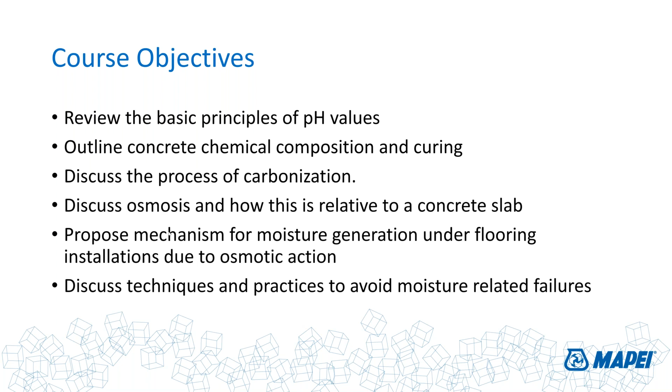We're going to talk a little bit about the proposed mechanism for moisture generation under flooring installations due to that osmotic activity, and discuss techniques and practices to avoid moisture-related failures. Again, a lot of this is based on me asking the question, well, where did the goo come from? And why did this happen? And what does this really tell me? And how do I avoid this in the future? So hopefully that fits with some of the things you'd like to hear about and learn about. Again, if you have any questions, by all means, save them to the last, and I'll do my best to answer them.

Let's start off with a kind of dumb rhetorical question. Is it stone or concrete? It sounds silly, but the two are very similar products in some respects.

They're both very hard, both very durable, but made in considerably different ways. We'd love to be able to build on stone, and some of our ancestors built on nothing but stone, carved it with hand and chisel, and that's what you walked on, leaned on, and what protected you from the rains and elements outside. But how was that made? Obviously it's a natural process over billions of years at very high pressures and temperatures, and you wind up with granite or marble or whatever else, but they're all stone.

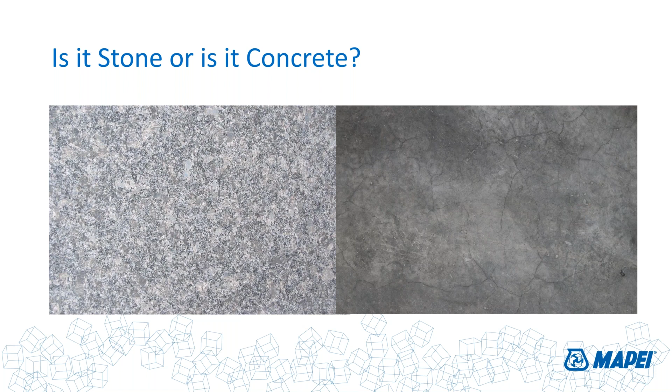Concrete, what you might consider synthetic stone, has many of the same properties. It's very strong, with compression strengths that can get up to 6,000 to 7,000 PSI, where stone's in the 12,000 to 16,000 PSI range. They're both hard, with similar Mohs hardness scales, but they're put together considerably differently. Concrete is the result of a chemical reaction where water is added to some chemicals along with some aggregates, and over time it crystallizes and makes a synthetic stone. But that's about where the similarities end.

I'm going to go back and spend a little time talking about testing the health of a concrete slab, the things that are relative, or that we currently use to test a concrete slab for what we think is important as a floor covering installer. I think everybody understands what those tests are, but according to ASTM test methods or requirements for resilient flooring, I'll go through them.

There are three tests that are pretty important: the ASTM F-1869, the moisture vapor transmission rate test; the relative humidity test, which is ASTM F-2170; and the pH test, included in the ASTM F-710 documents. For those of you on the webinar today who are involved in this industry, if you don't have copies of these, I highly recommend getting the current ones from the ASTM website. They're copyrighted and owned by whoever pays for them, so it's something I can't just share with you, but you can buy your own copies. It's important to have in your document library, because all the procedures, requirements, and interpretation of results are in those documents.

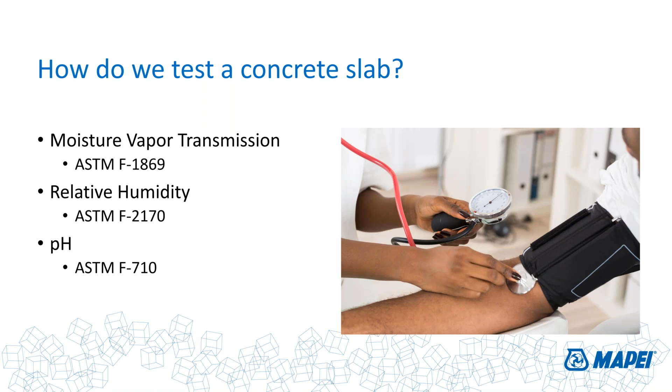So let's spend a little time explaining what these tests are, what they do, what they report, and how that's relative. The first one is the ASTM F-1869, the calcium chloride test kit of infamous renown.

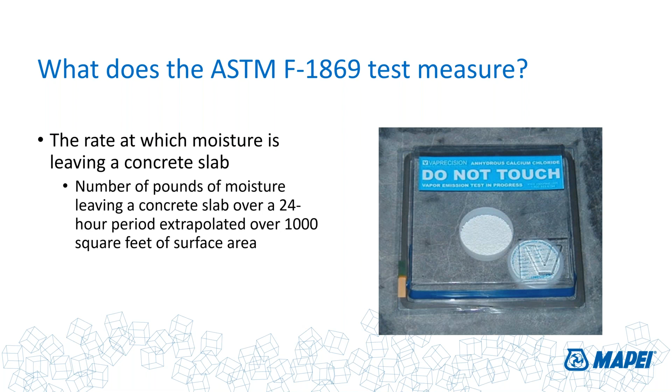What does that measure? It measures the rate at which moisture is leaving a concrete slab. That number is reported as a number of pounds of moisture leaving a concrete slab over a 24-hour period, extrapolated over 1,000 square feet of surface area. This test has been around forever, probably following the rubber mat test or other earlier methods, but it's a way to quantify the rate at which water is leaving the system. So again, what does that really mean? It tells you how much water is evaporating out of the slab over a period, over 1,000 square feet, and from that we come up with numbers.

From the days of old, the rule was you couldn't install anything over a slab with more than 3 pounds of water vapor leaving the system over 24 hours. Raise your hands as to when was the last time you've seen a 3-pound concrete slab — in my 35 years, I don't think I've ever seen one. But it does give you an idea of the rate. Obviously, theoretically that's going to change over time, as the water starts to leave the system, the rate will slow down, and so on.

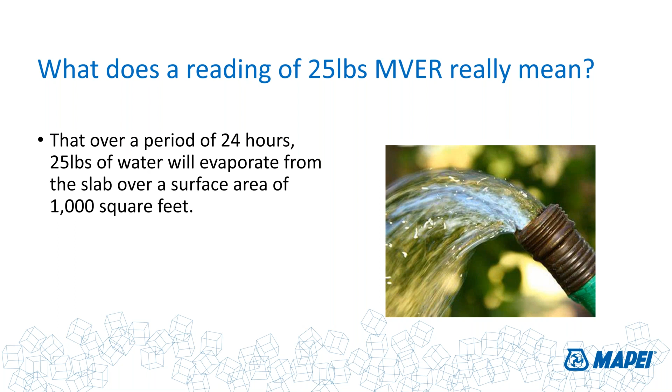Here's what I think is kind of an interesting thing — has anybody really thought about what that number means? Is it a big number, a small number, what does it really mean? If you take the concrete slab you're trying to deal with, 1,000 square feet of concrete at a 6-inch depth is equivalent to, if my math is correct, 55 cubic yards of concrete.

That's a lot of concrete. 1 yard of concrete at a 0.5 water to cement ratio will have 235 pounds of water as part of the mix.

So 55 yards of concrete will therefore have 13,055 pounds of water in it. If you divide that, that's a lot of water - that's a pretty good swimming pool of water. And about 45% of that water is put into the system to help move it around, make it fluid, get it to be able to place, and also means that it's available to evaporate.

Or half of that number, 5,875 pounds, will have to leave through evaporation, or wick out or go somewhere else. But that's something that I've never really thought about, and then you might have some consideration.

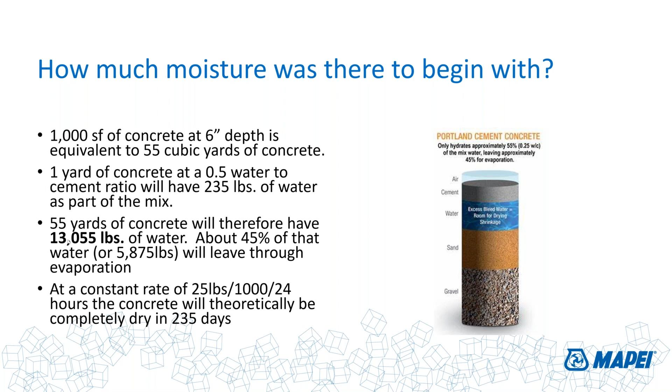And it's really something that's never really going to get to that completely dry phase. It's always leaving. So a little bit of trivia for you in terms of what to think about, but I've always wanted to know, and I'm curious minds, what does that mean to have a 25-pound rate of evaporation coming off a concrete slab? And what does that really mean in terms of how much water is really there? So now you all know a little bit about what that means.

Now, what's also important to note about the moisture vapor emission rate information is that once you cover it with an impervious moisture material, whether that be an epoxy membrane, vinyl sheet flooring, something that's non-breathable, or even tile and resilient tile products for the most part, once you start covering it with an impervious moisture vapor barrier or impervious floor covering material, you basically turn off the valve on the evaporation rate. That should be quite simple to you. And at that point, the MVER becomes irrelevant - it no longer has an opportunity to evaporate into the atmosphere.

Having said that, on the other hand, things that are porous or absorptive, like carpet or wood, will allow the slab to continue to breathe. But impervious floor covering is like closing the window on the outside - the humidity on the outside is going to remain on the outside. Porous floor coverings like wood or carpet are like closing the screen, slowing down some of the movement of the vapor from the concrete, which in this analogy is the outside humidity, to move through it as well. So something to keep in mind as well.

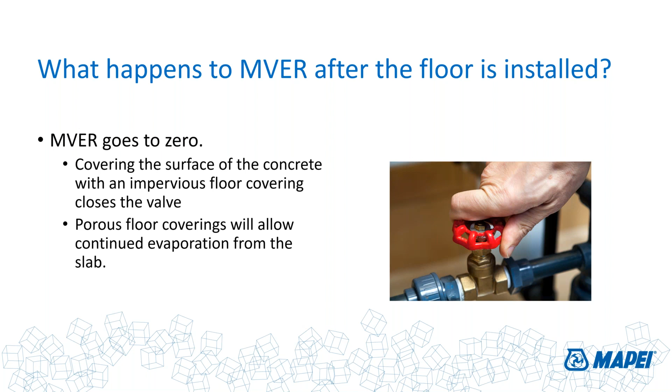I do want to address some mythology that I've heard numerous times in the field, and that is that the moisture vapor emission rate is a pressure. The difficulty, I guess the logic why people came up with this, is that somebody says it's 25 pounds, a concrete slab, and you get the feeling that we're talking about pressure, like air pressure going in a car tire - you fill your tire up to 25 pounds of pressure. This is not a PSI reading. Please do not construe that the moisture vapor emission rate is a pressure reading like PSI.

It is a rate at which things are moving through a concrete slab. It has nothing to do with pressure. And things that are going to affect that rate, and obviously things that they've tried to address in the ASTM F-1869 standard, are things like the porosity of the concrete slab. That's why they want you to do this test on an area that has been ground or opened up, as opposed to something that's highly polished and finished, so you get an idea what's underneath it - which I always thought was kind of weird, because you're not going to grind the whole floor, you're going to install on the burnished concrete. But okay, that's the standard that allows you to get to a consistent surface to work with, because burnishing and polishing all comes up with different rates of porosity.

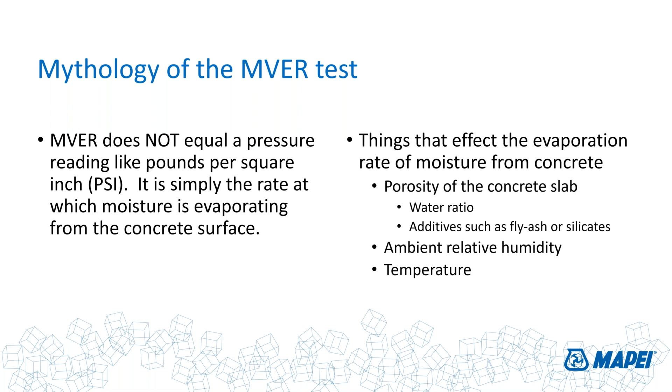All these things are chemical reactions, and all of them are dependent on the temperature at the time. Again, lower temperature means lower chemical reactions, lower emissions, lower evaporations. Higher temperatures, on the other hand, will make things a lot faster. So something to think about.

The other test that we perform on concrete slabs that's become very common and very important is the ASTM F-2170. This is the test that measures the amount of humidity contained in the concrete slab. I think this one is becoming more relevant and more important to us in the floor covering industry, because it really tells us more about the state of a concrete slab, the condition inside.

It's also important that you realize that the probes used to measure the RH of a concrete slab require you to know the depth of the concrete slab you're working with, because it's supposed to be put into the concrete at 40% of that total depth. So if it's a 4-inch, 5-inch, 6-inch, 8-inch, or 12-inch concrete slab, you have to do a math calculation to figure out how deep your probes have to go in. That's a very important deal.

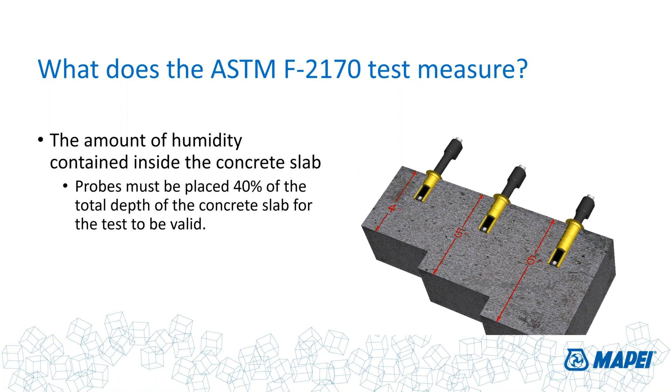Why is that important? Because what this test will tell you about the concrete slab is what is going to be the expected homogenized humidity of the concrete slab once you put an impervious floor covering on top of it. So again, the concrete in its normal living condition, uncovered and open to the atmosphere, is allowed to evaporate.

It's definitely going to be a little bit drier on the top of it, and towards the bottom, it's supposed to be - if you're on top of an impervious moisture barrier, which every concrete slab is supposed to have, which we know it doesn't - a lot damper on the bottom. But as soon as I put something on top of it to close it off, all of the humidity balances itself out. So the RH reading that you get in a concrete slab is supposed to be indicative of what it's going to be once you cover it with floor covering.

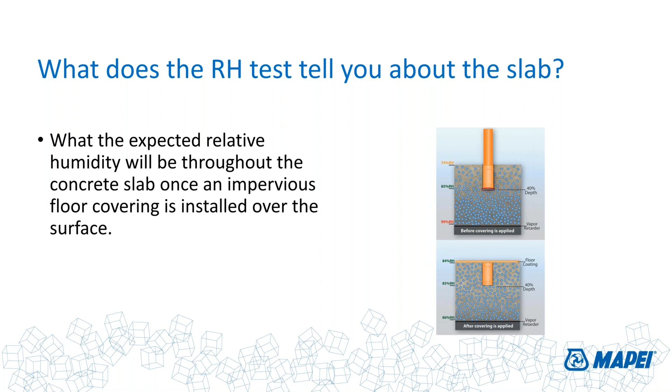I think that is really the more important one to deal with over time. And again, what would change that RH condition? Most oftentimes, the big deal about this is whether or not you had a moisture vapor barrier below the concrete slab or not.

If you opened that up or poked some holes into it, or didn't put one in place, then you're in constant contact with the ground. And if the water table changes or if water comes from the outside, then you can certainly have some impact on the overall humidity in that concrete slab.

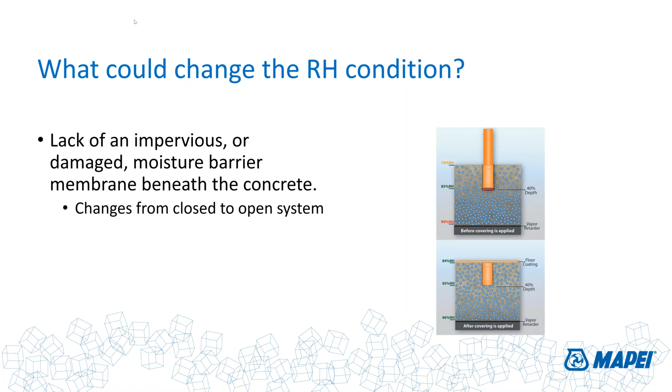Okay. All right. I don't know why this isn't okay.

The last test we're going to talk about, and probably the most important thing we're going to spend more time with here, is the test of the pH of a concrete slab. It's not really been talked about much, but I would like for you to put this more front of mind than back of mind.

We do an awful lot of calcium chloride tests. We do an awful lot of RH tests. That's all great, and that does tell us some useful information. But I think the most important thing to deal with is what's on the surface and what is going on in terms of the overall pH. So what are we doing here? We're testing for the presence of soluble chemical compounds on the surface.

I want to spend just a moment here to bring this to your attention. When we run a pH test, what do we do? We take some deionized water and drop it onto the concrete surface, and then, either using litmus paper or a pH probe, we catch the pH of that solution.

What's going on? We're actually dissolving something off of that surface that gets into the water. Would you drink that water that was coming off a concrete slab? A dumb question, please don't do that. But the point I'm making is that things are dissolving.

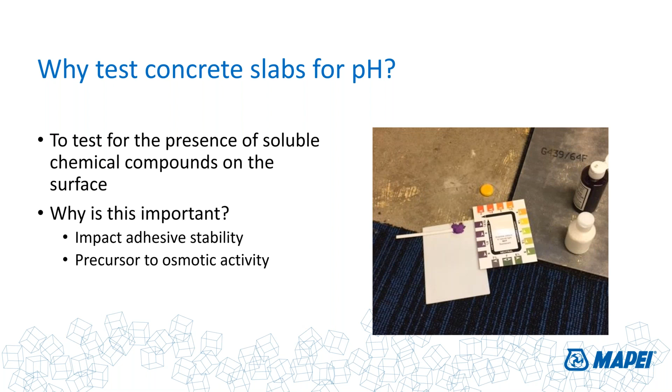Is it also dissolving what's on the concrete slab? And does that have some impact on the adhesive performance of going into the glue? The answer is hell yes. So we'll talk a little bit more about that, because this is a very important thing.

So what does pH measure? This is really important for you all to remember: pH is a measurement of the concentration of hydrogen ions or hydroxide ions in solution. That's all it does. It's very specific for that. Nothing else—no calcium ions, no sodium ions, no potassium ions, no sulfate ions, no chloride ions. Nothing but hydroxyl ions or hydrogen ions, acids or bases, okay?

So in order to do this test, you've got to have water and some sort of water-soluble salt of acid or base—for example, calcium hydroxide, or lime. Where does the lime come from in this particular situation? We'll talk about that. So that's very important.

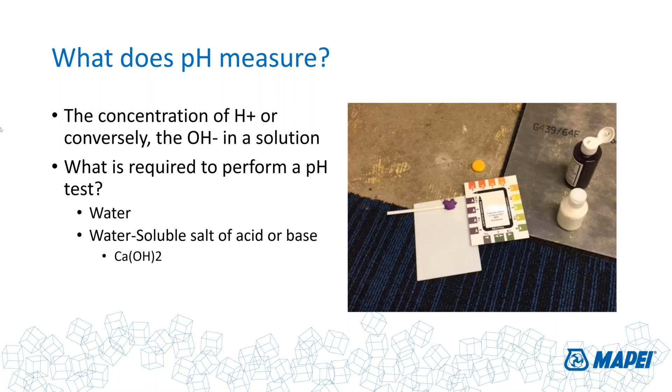So what type of adhesive do you think might be the most sensitive to pH? Is it going to be an epoxy, a urethane, a water-based adhesive like acrylic PSAs or SBR latex stuff, modified silane, or tape systems?

Hopefully you've answered water-based, because that's the correct term. They're going to be the most sensitive to the pH of a concrete slab because they have water in them. And the water is obviously going to help disperse what's in the adhesive, but it's also going to dissolve what's on the surface of the concrete slab.

So if you ever wanted to know why we tell you not to install water-based adhesives on concrete slabs with pH higher than 11 or 12—this is the reason. The higher you get, and this is a logarithmic scale: a pH of 7 to a pH of 8 is 10 times higher, and each step up is 10 times higher again. So it's a very high concentration of hydroxyl ions when you get into that pH of 12, 13 to 14.

It's the kind of stuff that will burn your skin. This is nothing to mess with. I'll remind you that wet concrete at a pH of 14 is super corrosive, and if you're not wearing proper protection while you're monkeying around with it, you'll wind up with some pretty significant burns on your hands, and they are painful. Trust me, I've been there and done that before.

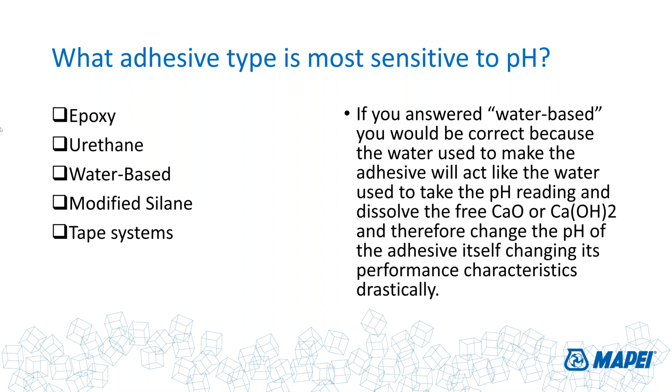So anyway, it's very important to realize that a high pH concrete slab is not a good thing to be working with water-based adhesive on. So what does the high pH tell you about a concrete slab?

What you're really measuring at this point in time basically tells you how green or how young the concrete is, or whether there hasn't been enough carbonation on the surface to neutralize it. So green concrete, as I mentioned before, has a very high pH, and it hasn't had enough time to react with the carbon dioxide in the air to neutralize the surface.

We'll talk a little bit about carbonation here in a minute. What that means is the surface has a high concentration of calcium oxide or calcium hydroxide, and so on. Calcium oxide is a very important component of cement, and when it reacts with water, it creates that calcium hydroxide—the lime portion—which results in a very high pH. So again, what are the risks of installing over a high pH slab?

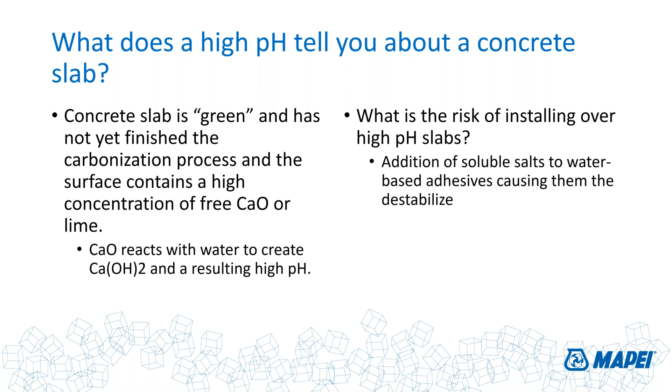The addition of soluble salts to water-based adhesives can cause them to destabilize. For any of you who have worked with SBR-based latex adhesives for the installation of broadloom carpet, a high pH concrete slab is notorious for causing destabilization, which results in what people call balling and stringing underneath the trowel. Why is that happening? Is it because the high pH is dissolving into the adhesive mix, changing the pH of the adhesive itself, causing it to destabilize and clump out of solution? And you wind up with a mess on your hands.

What does a neutral pH tell you about a concrete slab? If you put drops of water on a concrete slab and you're still getting 7, which is neutral, that tells you there's something on the concrete slab inhibiting you from actually coming in contact with the pH of the concrete itself.

Things like sealers, coatings, or curing compounds are something you might not necessarily see. They're clear generally speaking, but they're prohibiting that water from contacting the concrete. Guaranteed 100% of the time, if you have an open concrete surface and drop water onto it, something's going to dissolve into it and you'll get a resulting pH. But if you've got a coating on top of it, you'll get that neutral pH.

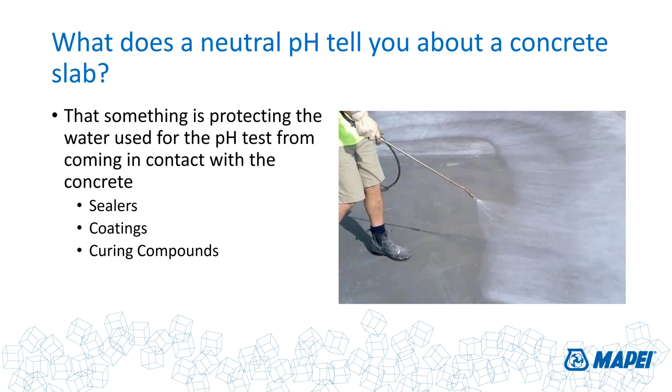So what would I do if I had a neutral pH in a concrete slab? I would abrade it, try to remove some of the coating on top, and redo the pH test. Nine times out of ten, you'll get something between 9 and 12. That's important to know.

So summarizing what this stuff is, and we're going to get into the science here in a minute, hopefully this has been science and not mythology. Just to confirm again, the moisture vapor transmission rate generates results that are the rate of moisture evaporation from the slab. Keep in mind there's a lot of water in a concrete slab over an area of 1,000 square feet. That's going to take a long time to totally evaporate. So that 25-pound number should really tell you, wow, there's a lot of water in here.

Even if it's 12 or 8, do the math, go back to that 6,000 pounds of water remaining. And if it's an 8-pound concrete slab... I can't even do it, 720 days before it gets dry. Sorry, my math is gone.

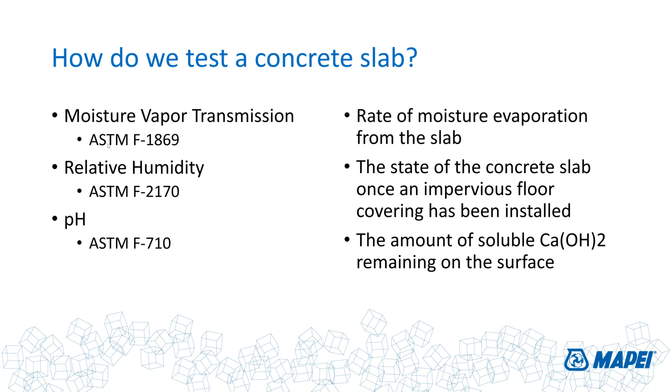Relative humidity tests will give you the state of a concrete slab once an impervious floor covering has been installed. Again, it's talking about what happens when you cap it. And the pH test is very focused on the fact that it tells you the amount of soluble calcium hydroxide remaining on the surface. But is that all that's on the surface?

Let's take a little bit of discussion about what goes into making concrete. For those of you on the phone, I'm sure many of you know quite a bit about this, maybe more than me, which is entirely possible. But just be aware that concrete is made out of cement to start with. Where does cement come from? It's from limestone, chalk, basically calcium carbonate, combined with shale, which is the aluminum and silicate part of it, with iron and silica sand and so on and so forth.

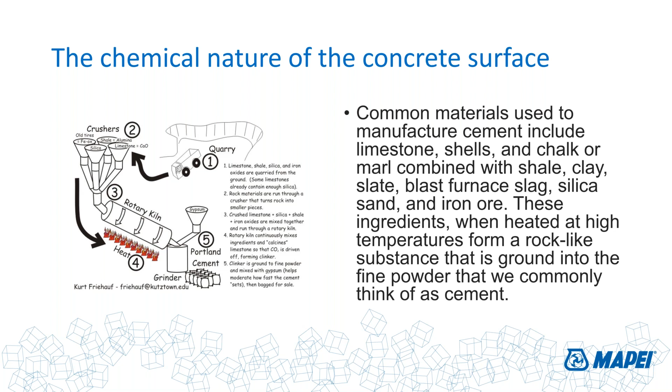All these things are put into a rotary kiln, turned, and heated up to an incredible amount of heat, over 2,000 degrees Fahrenheit. You create a thing called clinker. The clinker goes to the grinder, and that creates what we commonly know as Portland cement. So it's a very interesting, complicated chemical process, and it creates a very hygroscopic material in the form of cement. It wants to go back and get into a more common state. So this is what comes out of that when that process is all done.

When you go to the kiln, dry cement contains tricalcium silicates, dicalcium silicates, tricalcium aluminates, tetracalcium aluminoferrites, and the gypsum additives of calcium sulfate dihydrate. So I get points for saying those things properly without necessarily stumbling on the words. But this is the kind of chemical stuff that goes into making cement.

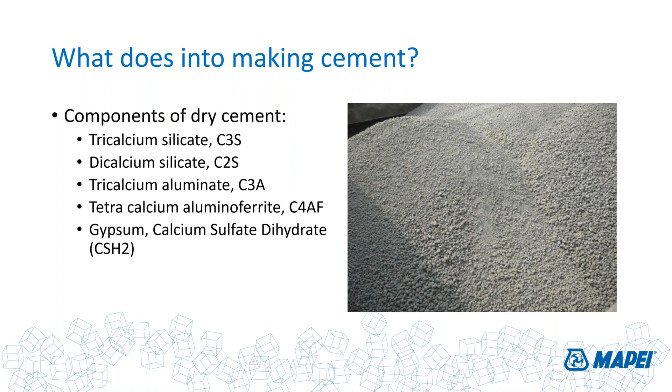And all these things are going to react with moisture when we put them together and create concrete. So it's concrete. It begins with a pretty good chunk load of cement, and then we add aggregates, fine and coarse sand, and larger aggregates. This is the stuff that we get to work with when installing the floor covering.

There are also some additives that go into the equation: water reducers, flow enhancers, set time controls to create a winter blend, to create a summer blend, freeze-thaw stability, porosity control. A variety of different bits of mummy dust go into creating a concrete slab. But the two main items are cement and aggregates, fine and coarse sand.

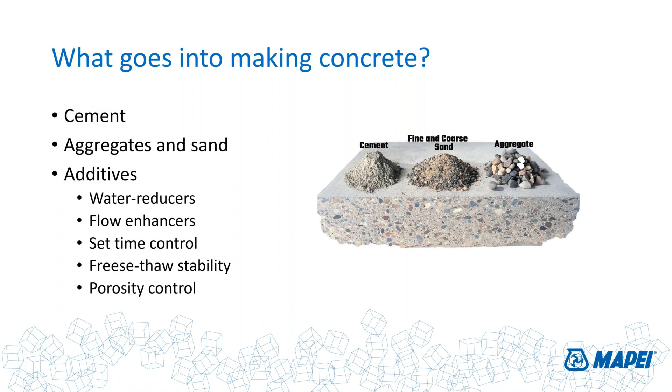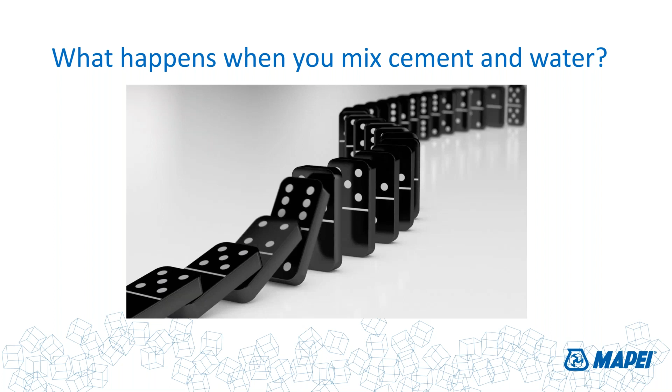So what happens when you mix the cement, water, and sand all together? It becomes a very complicated and beautiful chemical reaction of things that happen.

All of those silicates, the tricalcium and dicalcium silicates, start reacting with the moisture, creating ettringite and calcium silicate hydrates, releasing calcium hydroxide. You're whipping in some air into the thing as well as a bunch of heat being generated as part of the process.

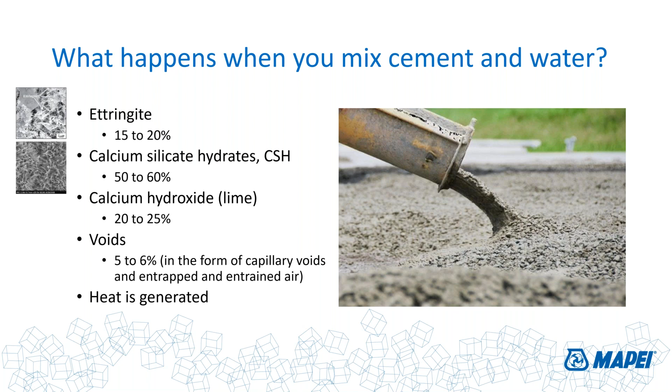It's important to understand that concrete's two really important aspects of strength and its ability to be that synthetic rock are the crystalline structures formed by the ettringite, which are the long spindly crystals, and the calcium silicate hydrates, which really build the strength. Those are the shorter crystals, but they're more integrated. We can see some pictures of what they might look like in those electron scanning microscope images on the left.

Okay, so once the concrete is placed, what do we do next to it? We start vibrating it, shaking it, and working it into a flat surface - steel troweling it, bull floating it, whatever you want to call it - to get it into a smooth finished surface which we're going to have to put our floor covering on.

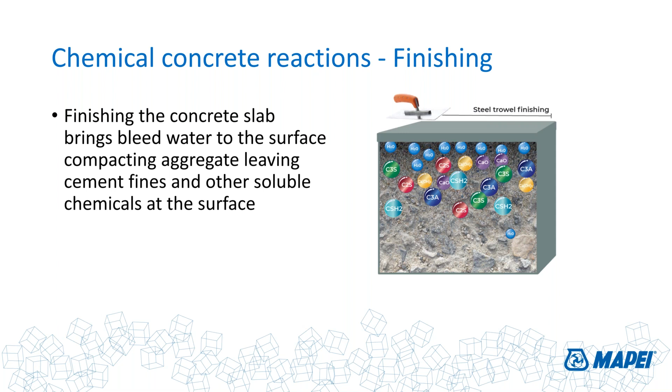That finishing process brings the bleed water to the surface. And what is bleed water? It's that water of convenience, the water beyond what's needed to hydrate the cement. That liquid water is mixed up in this chemical soup of calcium hydroxide, calcium oxides, sulfates, and all that kind of stuff, being solvated in water and brought up into a very concentrated layer on the surface of the concrete slab.

That is again a concentrated mixture of calcium, sodium, hydroxide, and sulfate ions that sit on the surface. As that bleed water evaporates, if you don't work it back into the concrete over time, it's going to leave a salt deposit on the surface.

Calcium hydroxide is going to get into its crystalline form. The sulfates will go into their crystalline form too, all of which you might call efflorescence. This is the white crystalline structure you see on some concrete slabs. It's very brittle - you can take your razor and scrape off the surface of it. But this is what's coming out of the evaporation process of that bleed water that shows on the surface.

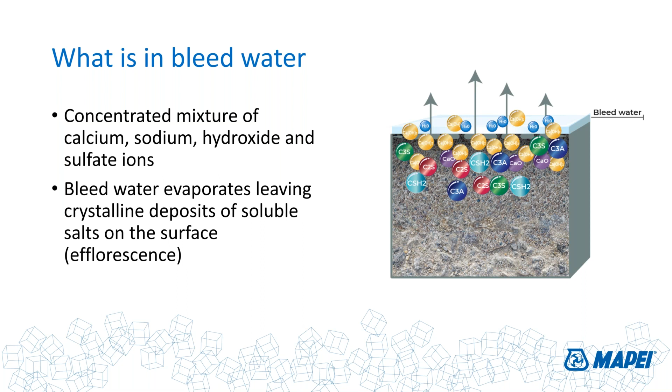If you allow the concrete its normal time to cure, what's going to happen to the calcium hydroxides on the surface of the slab? Over time, they're going to react with the carbon dioxide in the air and carbonate. As that calcium hydroxide reacts with CO2, it becomes calcium carbonate. That's kind of why a concrete slab will change color a little over time, from a greenish looking material to a little more pale, a whiter thing, because calcium carbonate is white.

How many of you remember, back in your youth in physical science classes, doing this test where you created a solution of calcium hydroxide in water and then blew through a straw into that and saw it change color? That's what we talked about. That change of color was a result of the reaction of the CO2 in your breath with the calcium hydroxide in the water, creating calcium carbonate as a flocculent solution that created the white color you're getting in that effect.

So that's helpful for us as floor covering installers, to allow a concrete slab to carbonate, because there is a considerable difference in solubility in water. Calcium carbonate is not that soluble in water. Calcium hydroxide is extremely soluble in water. I would rather be working on something that is not soluble when I'm putting water-based adhesive on top of it, rather than something that is extremely soluble.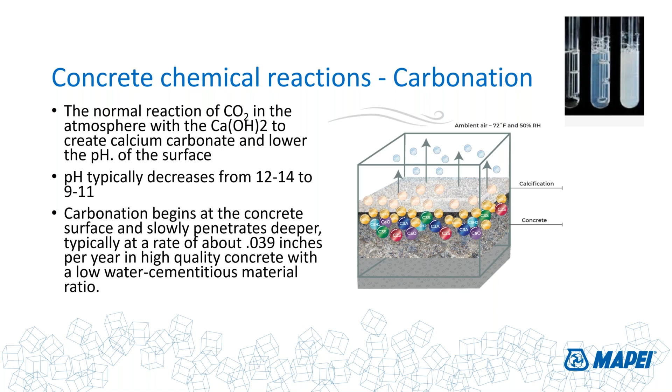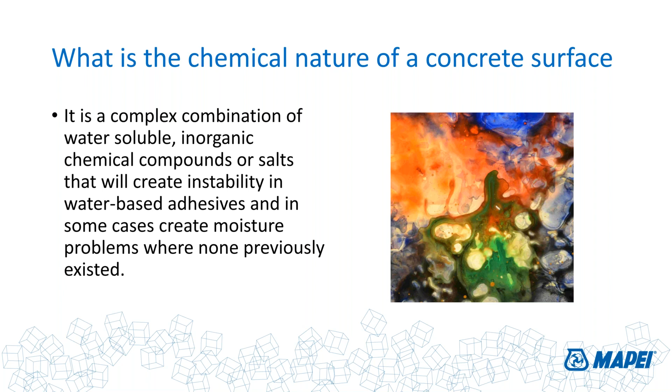So what is the chemical nature of this concrete surface? If you're not getting the overall picture of it right now, it is a complex combination of water-soluble inorganic chemical compounds and salts that can create instability in water-based adhesives, and some create moisture problems where you might not think anything previously existed. It is not a rock. We know that concrete is not rock, but it's something that is soluble, and that solubility is going to create some problems for us downstream if we're not careful.

So what is all this talk about soluble salt deposits on the concrete slab, and why do I care about it being a floor covering installer? I did my pH test, I did my calcium chloride test, I did my RH test, everything's fine. Why can't I just go ahead and install floor covering and not worry about anything going down the road?

The problem with that is that these salts are what we call hygroscopic. They absorb moisture. A common example of this is salt that we all know about. Anybody know why people put rice in their salt shakers on restaurant tables or outside picnic tables? It's because the salt without the rice will absorb moisture and start clumping up. It'll actually get to be a solid block of salt because it's going to continue to absorb moisture from the air. Well, the rice acts as a desiccant. It sucks up the humidity and keeps it from getting into the salt. So that's why people put rice in the salt to help keep it dry.

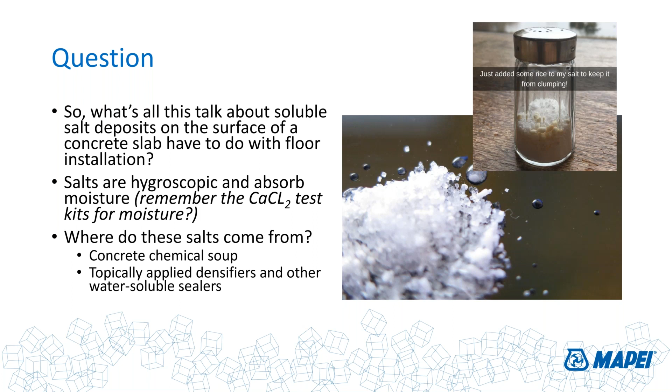It can come from excess bleed water, it can come from too much water in the mix, it can come from topically applied densifiers and other soluble materials that can add to the overall salt concentration on the top of the concrete slab.

So what's so bad about that? Well, as we mentioned, these salt solutions are hygroscopic. And when they come in contact with vapor or moisture, they're going to solvate, and they're going to create a higher concentration of solution on a very low concentration of solution below it.

So I'm sorry, I'm going to try to explain this again. If I have a high concentration of salt on the concrete surface, it's going to want to pull moisture out of the concrete below it in an attempt to solvate itself, to make things equal. One of the common laws of physics is that everything wants to be at balance. It's the laws of entropy. This is the laws of solutions here. They want to be equal.

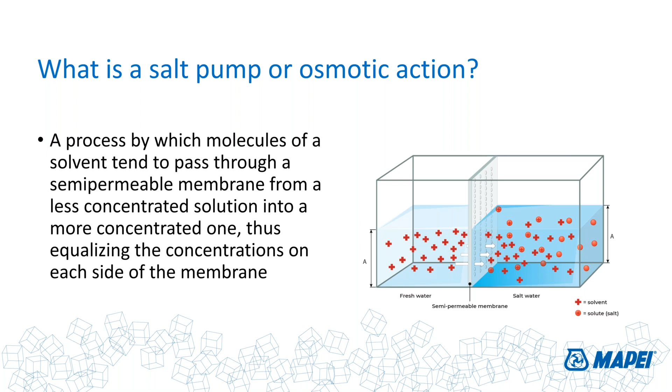If you put a semi-permeable membrane between a low concentration and a high concentration, the laws of physics, the laws of chemistry are going to tell you that the low concentration side is going to move through that membrane in an attempt to make that an equal balance. But if it can't go back through, you're going to wind up pumping liquid through that membrane, creating what we would call an osmotic equivalent point.

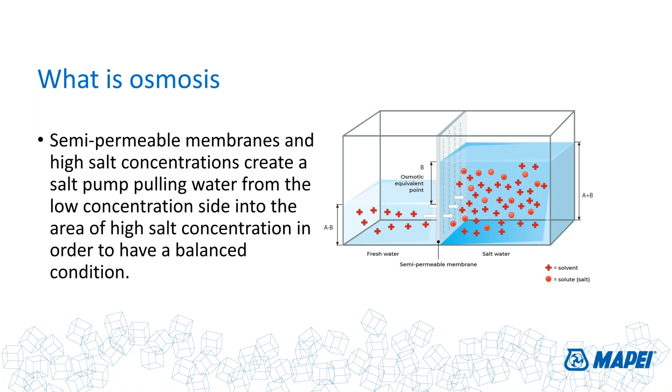So again, how does this all relate to the surface of a concrete slab? You'll notice in these little illustrations that I have this in the glass box. There's no way for the liquid to evaporate on one side, and it builds up on the right side. On a concrete slab that's open, if you've got a high salt concentration on the surface, this process is working, but you're not seeing it because the water is coming up from the concrete slab, blending in with a high salt concentration, and then evaporating into the atmosphere. So you kind of have a built-in drying compound on the surface of the concrete slab that's working just fine on its own, pulling moisture out of the concrete, evaporating on the outside, and leaving this high concentration of salt on the surface. Okay, that's what I would call that salt pump.

But when I put an impervious moisture vapor barrier on top of it, in the form of a vinyl sheet flooring or an LVT or something like that, I blocked the evaporation process. The liquid being pulled from the concrete slab, mixing with that salt concentration that was happily evaporating and not creating any problems, now can't evaporate, but the process still goes on.

So that high concentration of salt compound on the top layer of the surface of the concrete slab is sucking moisture out of the concrete below it in an attempt to equilibrate itself. Again, the vapor will move back and forth, but the salt solution can't go back down. But since it can't go back down, it still keeps sucking water up.

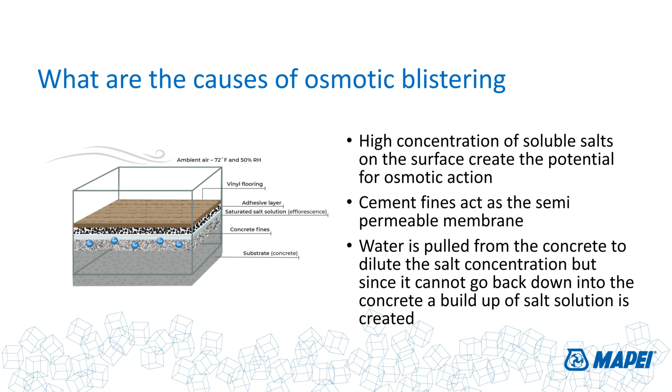And this is where you get that saturated salt solution coming up underneath and building up underneath your impervious floor covering. This happens under epoxy coatings, this happens under sheet vinyl, LVT, and so on, where you've stopped the process of evaporation, but osmosis is still going, and you wind up creating this gooey layer of material underneath there.

That salt pump generation of liquid is a solution full of calcium hydroxide, sulfates, and all sorts of stuff that are going to be detrimental to the adhesives, patching compounds, and in some respects even the flooring material.

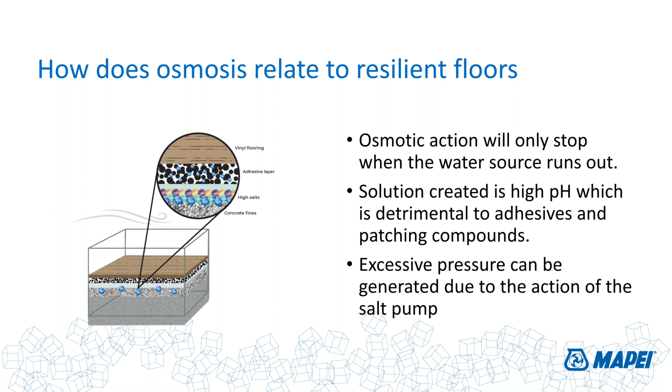This is something that is a big problem, and this is, in my opinion, what's happening when you pull up a piece of sheet vinyl and you see soup under the floor. My hypothesis is 9 times out of 10 that was the direct result of a salted slab that had a high concentration of some sort of salt contaminant on the surface of it, creating an osmotic action, the salt pump sucking liquid up out of the concrete slab, creating this high pH solution, dissolving the adhesive, hydrolyzing everything, creating a massive problem for us. Again, that's what we're talking about here, the high pH liquid.

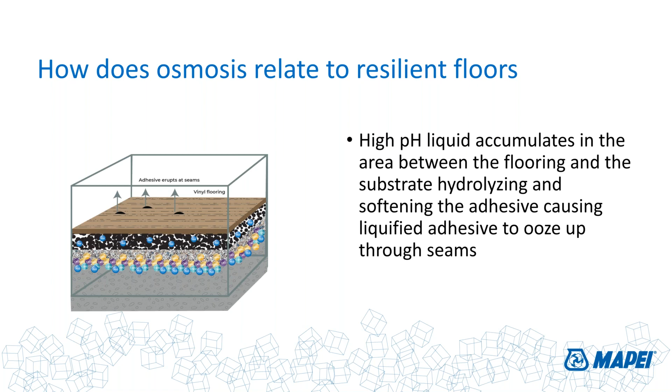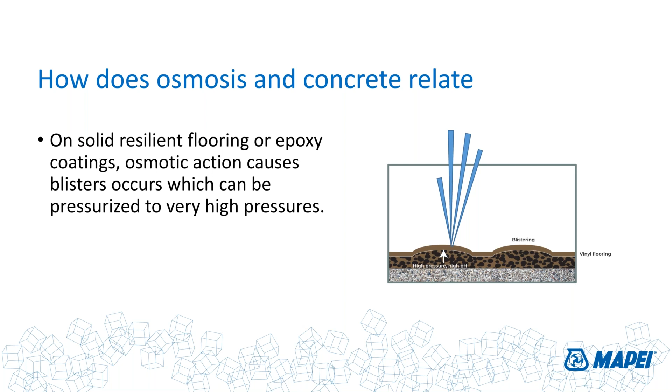This can even create enough pressure that under epoxy membranes you get this classic picture you've seen where a guy's poking a knife in a sheet vinyl floor and you get water spraying out. Well, that's not water, it's a solution of chemicals, and you certainly wouldn't want something to get on you. You need to make sure you avoid doing that. But it's a chemical solution that builds up enough pressure to blister epoxy coatings, resilient floor covering installed with epoxy adhesives or even PSAs or hard set acrylics. It can do all sorts of really bad things to you.

So how do we know if a slab is salted? It's really not something you can see visually, and it's not something you're going to find out by doing moisture vapor emission rate tests or RH tests.

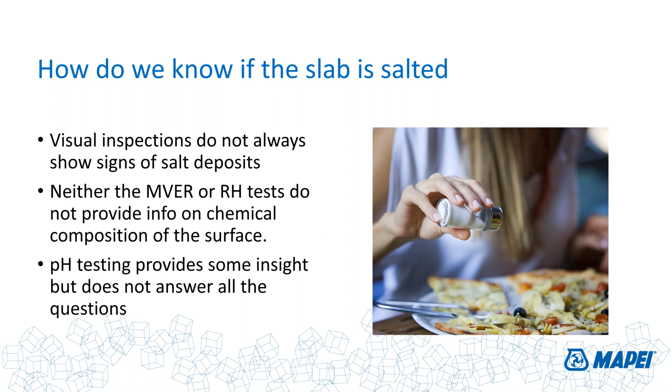The pH test will provide some insight. Again, keep in mind that the pH test only measures remaining hydroxyl stuff, which is the calcium hydroxide portion of it, but doesn't give you any idea of what concentrations there might be of sulfate ions, chloride ions, sodium ions, or calcium ions, the other kinds of things that are going to be hygroscopic and absorb moisture over time and create these kinds of problems for you.

Ideally, the best way to do this, and no one really wants to hear me talk to you about this, but petrographic analysis of a concrete slab is really a good idea to do.

This is the kind of stuff that should raise your spider sense and make all your feelers go off and say, I might have a problem if I install over a concrete slab that has a high level of these kinds of materials on the surface, whether it's a high pH or a high sodium or high potassium concentration. These are the kinds of things that are going to initiate this salt pump action on a concrete slab, causing it to have an impact on the adhesive performance, pulling moisture up on the floor, creating liquid underneath the floor, all sorts of bad stuff that's going on.

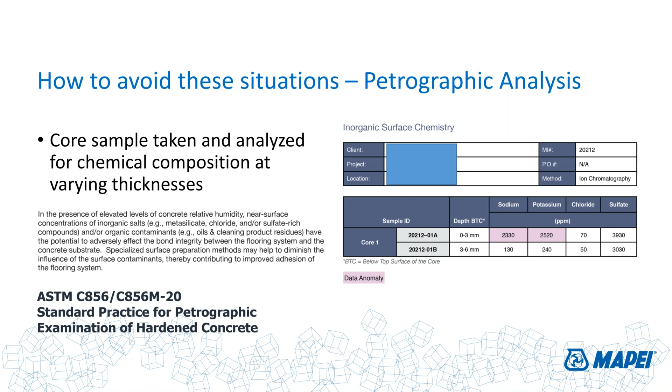Unfortunately, we oftentimes go to core samples when we're trying to analyze a problem. What happened? Why did this floor blow up? My calcium chloride numbers were good, my RH numbers were good, my pH numbers were okay. Everything looked fine. Why did it still blow? This is nine times out of ten the reason why that happens.

So I want to wrap this up. I appreciate your guys' time here, but let's just in summary, remember that concrete may look and feel like stone. It's hard, it's durable, it lasts forever, but it is made from a magical complex chemical reaction that does leave stuff on the surface that is soluble - calcium hydroxides, calcium oxides, sodium chlorides, calcium chlorides, and so on and so forth.

It's those soluble compounds that impact the performance of adhesives and can be the precursors to this salt pump osmotic activity that can create all sorts of problems for you. pH testing, although it's good, is only going to test the amount of free hydrogen ions or free hydroxyl ions, which is indicative of how early the concrete is, how much calcium hydroxide is on the surface, and so on. But it doesn't tell you anything about that other chemical soup, which we already know is in there based on what's going into the concrete mix to begin with.

Again, moisture testing is also important. It pretty much tells you the potential for feeding the salt engine. Osmosis is going to keep going, these salt pumps are going to keep functioning as long as there's moisture to pull from. So a highly moist concrete slab that's at the 99% level is like saying I got a really deep pool of water, and this salt engine's got a full tank of gas and it's going to run for 540 miles. As opposed to something that's a little bit drier - the moisture testing numbers are 75% RH and maybe 3 pounds of moisture vapor emission, or the tank is quarter full - then it's not going to be a problem.